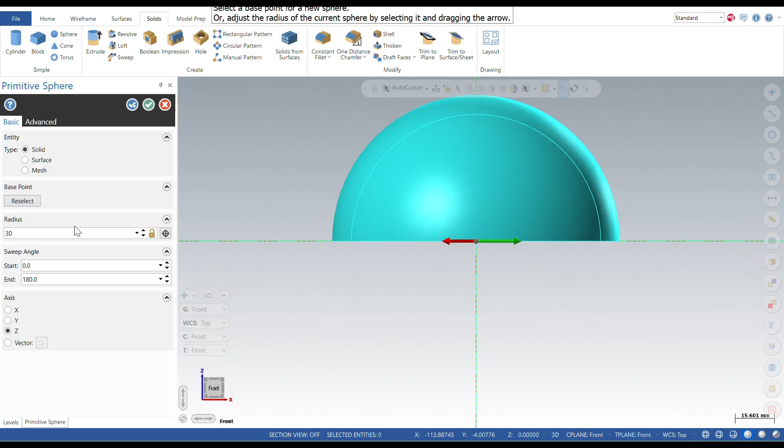Go to the Solids tab. Select Sphere from Simple Group. Mention the radius, start angle, end angle. Click OK.

Right-click, then select right plane. Go to the Wireframe tab, select Circle Center Point. Mention the radius. Use Selection toolbar to place the circle in the desired position. After placing the circle in the desired position, click OK.

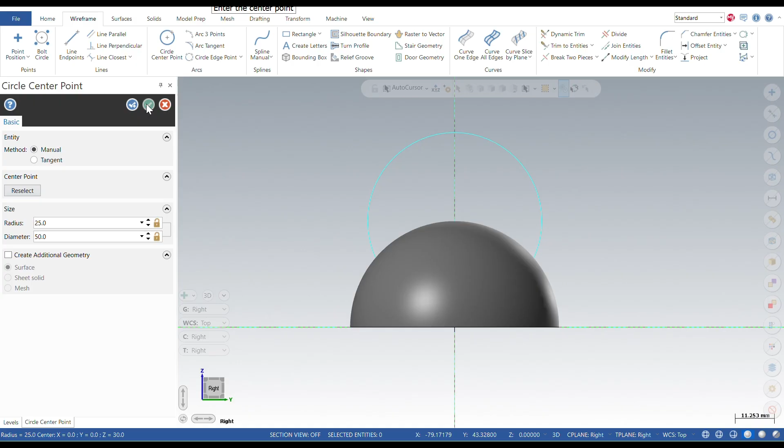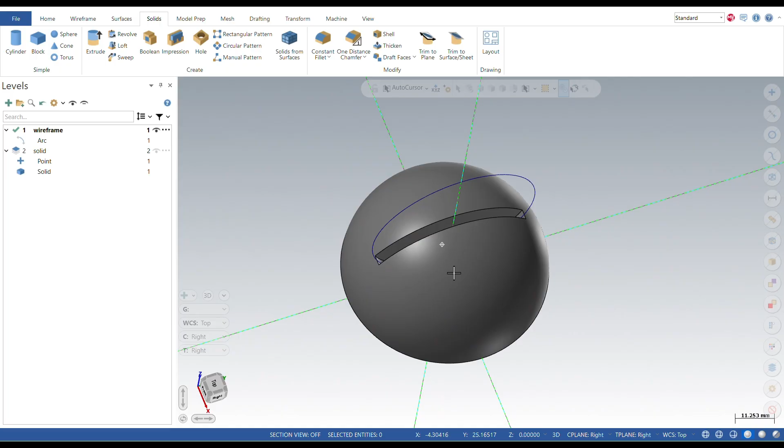Go to the Solid tab, select Extrude, select the chain. Select Cut Body in Operation Type, tick on both direction. Mention the distance 1.5 mm. Click OK. Right-click, select right plane. In Level Manager, hide the solid level.

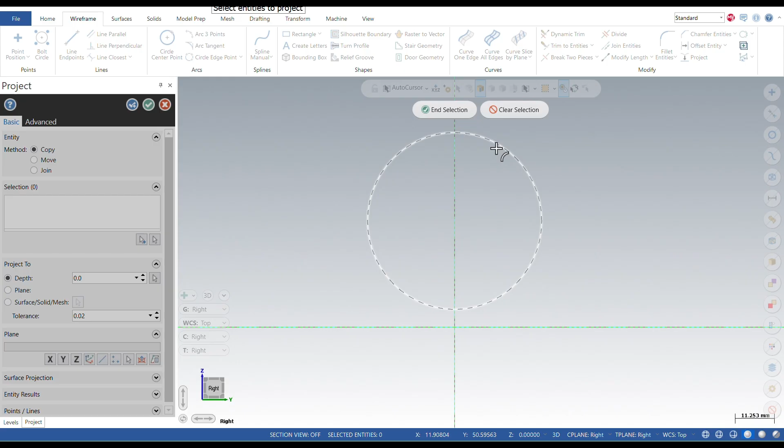Right-click. Select Front Plane. From Wireframe tab, select Project. Select the chain. Mention the distance 1 in positive direction, another 1 in negative direction.

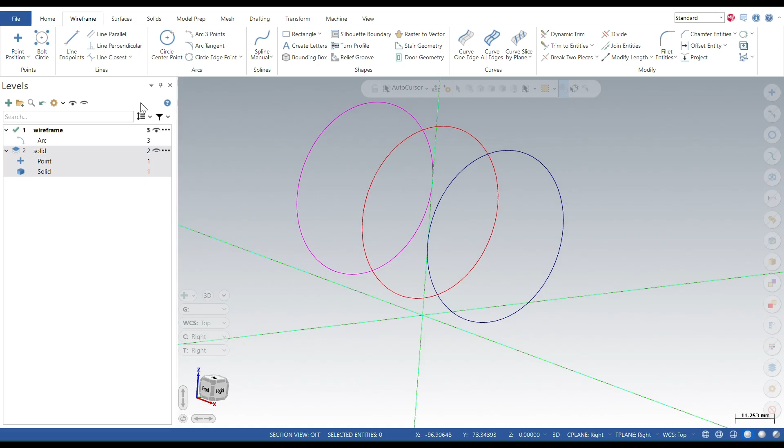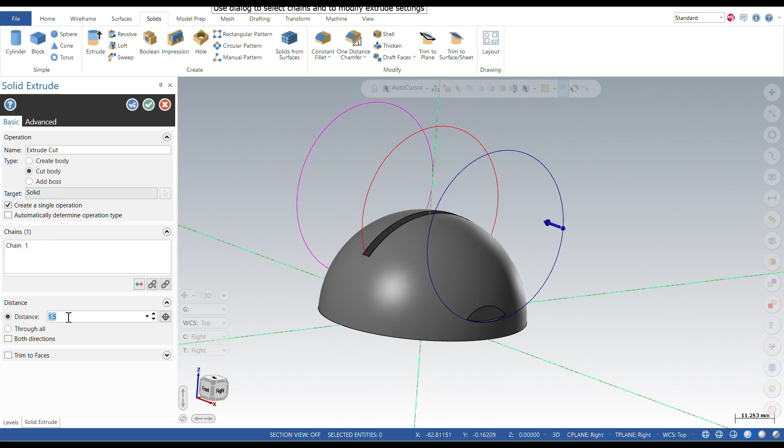Unhide the solid level. Go to the Solid tab, select Extrude. Select the first chain. Untick both direction. Change the direction. Mention the extrude cut distance. Same you repeat for another chain.

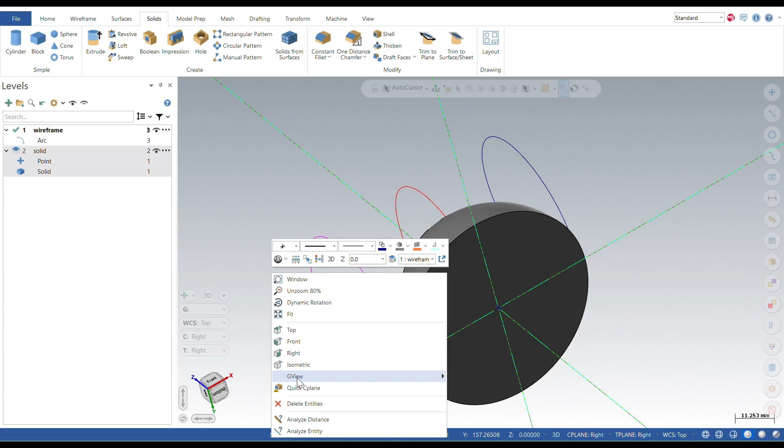Right-click. Select Bottom Plane. Go to the Wireframe tab. Select Circle Center Point. Mention the diameter. Place the circle in the desired position using Selection toolbar.

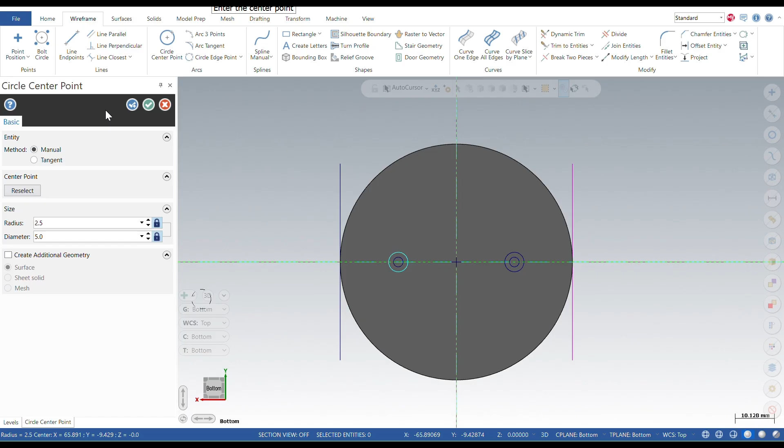Again make 5 mm circle in same position drawn previously. Go to the Solid tab, select Extrude, select the 2.5 mm circle to cut the body. Go to the Wireframe tab, select Project, select the 5 mm circle. Mention the projection distance.

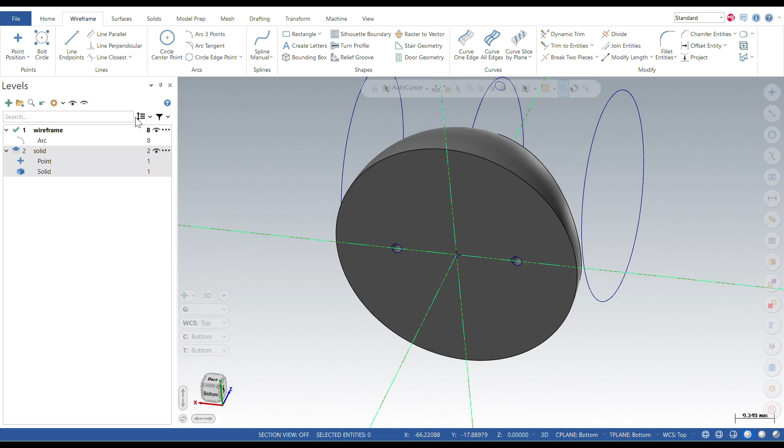Change the view to Wireframe. Go to the Solid tab, select Extrude, select the 5 mm circle chain.

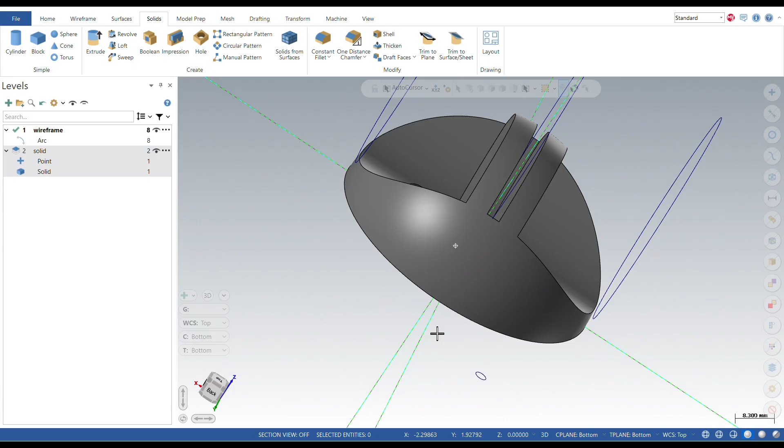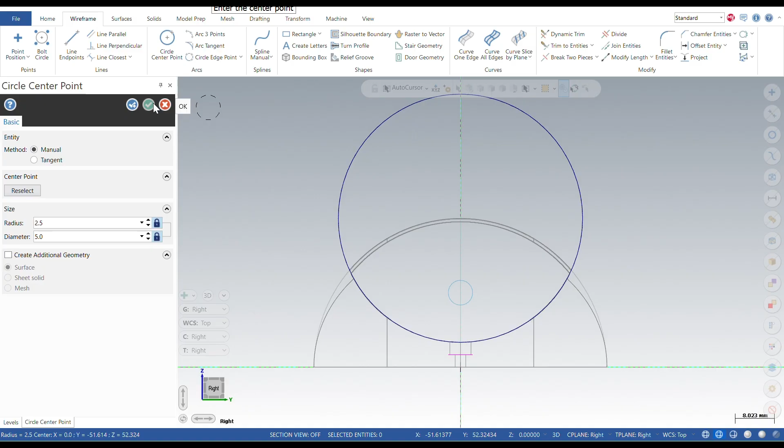Right-click, select right plane. Go to the Wireframe tab. Select Circle Center Point. Change view to wireframe. Place 5 mm circle in desired position using selection toolbar. Go to the Solid tab. Select Extrude Cut in both direction.

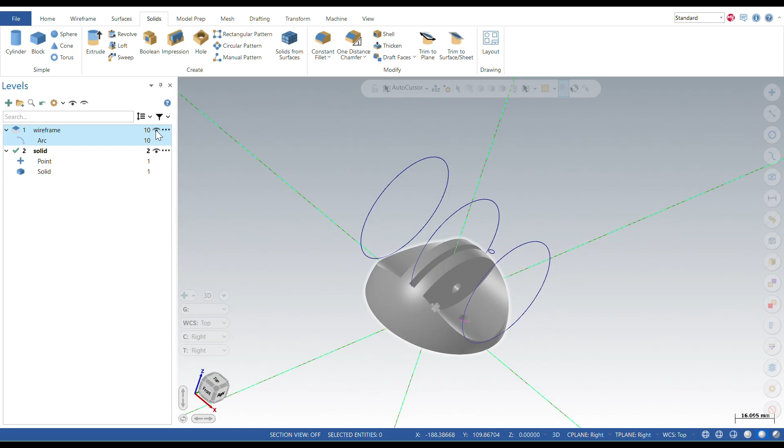Using Level Manager, hide the wireframes. Now our model is ready.